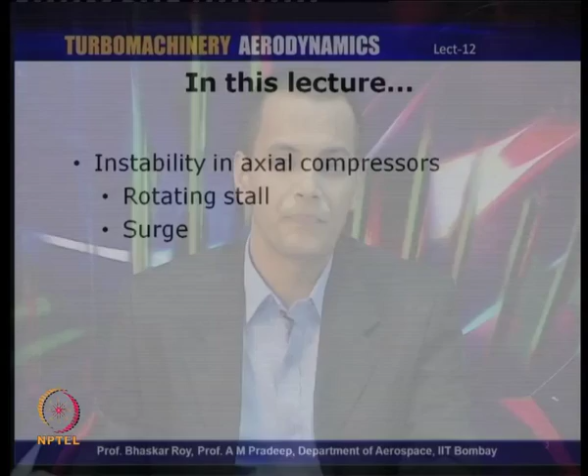So instability is the major topic we are going to discuss in today's talk. Basically we are going to talk about two different modes of instability in great detail: rotating stall and surge. These are the two basic aspects of instability we will discuss, and we will cover instability in general as well in today's talk.

Now, one of the major issues with engine operation, and the effect of trying to operate under off-design conditions, is the fact that there is one component which will limit the performance or operation of the whole engine as a whole, and that is the compressor.

So the compressor is the component which determines the stability and limits of operation of the engine as a whole. In the last lecture, if you remember, we had discussed the axial flow compressor performance map. During this discussion, I had mentioned that there are two limits of operation of the axial compressor.

On the right hand side of the compressor map, we have what is known as the choking point or the choke limit, which is to do with the maximum mass flow rate, and on the left hand side of the compressor map we have what is known as the surge limit or surge margin, the limit to which surge can occur.

So these are the two bands or regions or lines within which the compressor operation is considered stable or feasible. If we try to operate the compressor beyond these limits, the compressor is going to go into instability modes and the operation cannot be successfully carried out.

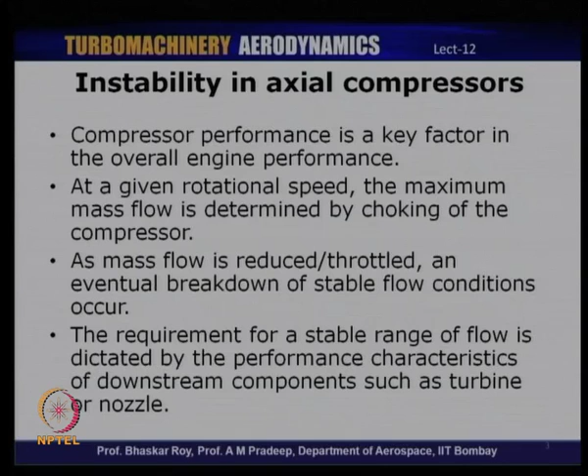As I mentioned, compressor performance is obviously a key factor in the overall engine performance. At a given rotational speed, we know that the maximum mass flow is determined by choking, and as mass flow is throttled, there is an eventual breakdown of stable flow conditions, and the stable performance or range of the engine is therefore dictated by the compressor performance itself.

We also like to understand here that an aircraft engine, as we know, is designed to operate for a certain condition known as the design condition, but during takeoff, climb, cruise, and finally landing, we see that the engine is operating under a variety of operating conditions.

So, how is it that we can ensure that this engine is going to operate stably in all these operating conditions? That is a big challenge for an engine designer, because there are so many components that fit into an aircraft engine, and how do we ensure that each of these components will be able to perform well under all these so-called off-design conditions.

One of the most crucial components amongst all the others is the compressor, because compressor performance is limited between the choke limit and the surge limit, and there is a certain band which we can use for stable operation of the compressor. We do not want the compressor to operate close to these two limits, because that will risk the compressor going into instability modes in the event of an off-design operation.

The ability to efficiently operate such an engine at all these operating conditions will also depend upon a successful match of all the components within an engine and also within the stable operating range.

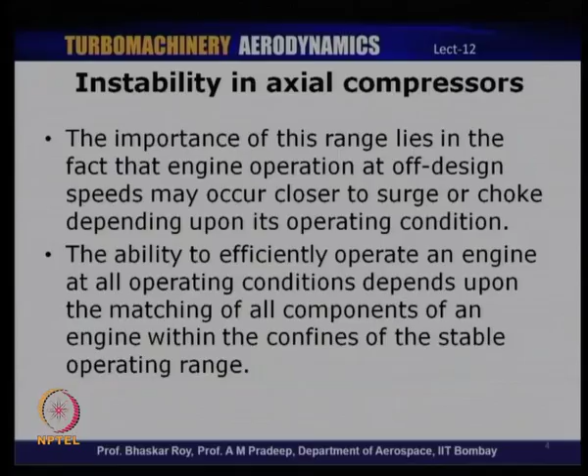For example, an engine typically has an air intake, then a fan or compressor, then the combustion chamber, turbine and a nozzle. These are the salient features of a so-called turbojet engine, and all these components need to operate in a synergistic manner in the given operating range, as well as under off-design conditions which are expected to be encountered by the engine.

The compressor being the key component among all of them, it is very necessary that the engine designer understands the performance of the compressor over a range of these operating conditions.

So what I will do now is quickly go through the compressor map once again. We have discussed that in one of the earlier lectures. Let us take a quick look at that once again, and try to understand what I am currently talking about - what are these different limits I have been mentioning.

Here is a typical compressor map, a typical multi-stage compressor map. On the y-axis we have the pressure ratio, and x-axis is the corrected mass flow rate m dot square root of theta by delta, where theta is the temperature ratio and delta is the normalized pressure ratio. A typical compressor map will consist of lines corresponding to different speeds - rotational speed is given by these different lines.

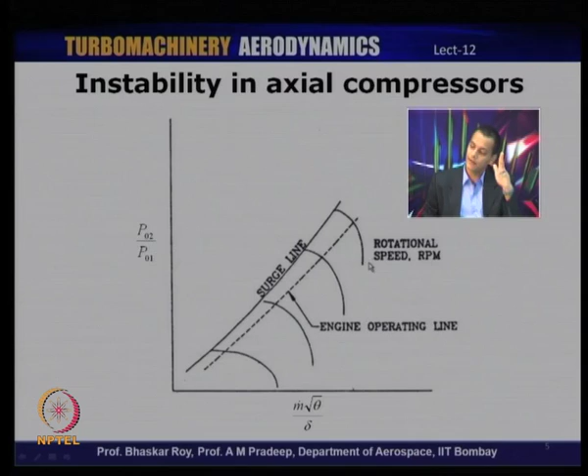We have seen two different limits that I was talking about. One is about choking - that is this line here. If you draw a line here, that corresponds to the choking limit, because beyond this point the mass flow rate does not change for a particular speed - that is the choking limit.

On the left hand side, we have a line which I have denoted here as the surge line. We will talk about surge in a lot more detail in some of the later slides. Compressor operation on the left hand side of this line is unstable because of the occurrence of surge. And what is shown here by the dotted line is the engine operating line.

Now, the engine operating line is the line which the designer has set for stable operation of the engine at different speeds, and the difference between this and the surge line is the surge margin. You can see that it is a rather narrow margin, slightly exaggerated here. In modern engines, the surge margin is kept very narrow because higher efficiency is obtained very close to surge.

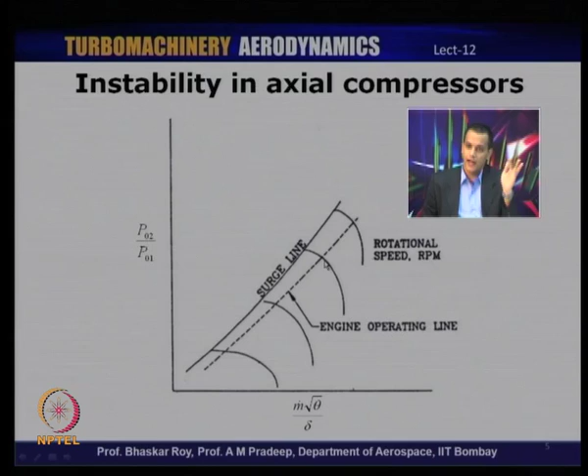So this is a typical compressor map, and this is going to limit the performance of an engine as a whole, because you have so many other components in an engine - the turbine, combustion chamber, nozzle, intake, and so on. The compressor map will tell us what kind of limit we have for operating this engine in a stable manner.

So the operating line you saw basically corresponds to the line or zone designed by an engineer for stable operation of the engine. The engine is still allowed to deviate from this operating line by a certain amount, but certainly not beyond the surge margin, because that would mean the compressor has surged, and that would also mean the engine operation is in danger. We will discuss surge a little later.

So the basic intent of this lecture is to understand what are these different instability modes that are likely to be encountered by a compressor, what is the mechanism of these instabilities, and what really happens during these instabilities. But before that, let us first try to understand what we mean by an instability in the first place.

Let us try to define instability, and from there we will talk about instability as applied to a compressor. If you have undergone certain courses in physics and equilibrium and so on, you are probably familiar with stability or instability as a general term. We are referring to that in this context also, in that fashion.

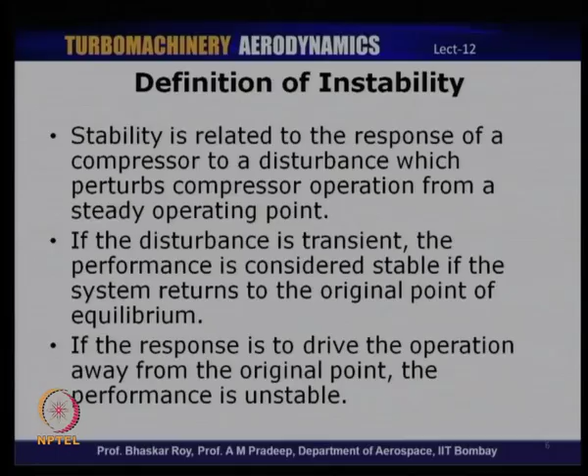So the compressor could, depending upon its mode, operate in either of these regimes. It could either return to its original state, where we say the compressor is indeed stable, or it could happen that the compressor does not return to its original state, which is referred to as an unstable mode of operation of the compressor. So these are the different issues we are going to discuss in today's talk - what are these unstable modes of instabilities that a compressor is likely to encounter.

So let us now talk about the different types of instabilities that a compressor will encounter. We can classify instabilities encountered by a compressor broadly into two types: one known as operational instability, and the other known as aerodynamic instability. So there are two areas of compressor performance that relate to stability - one is operational stability, the other is aerodynamic stability. Operational stability involves matching the performance characteristics of the compressor with the downstream components. Aerodynamic stability is the limitation of steady operation of the compressor due to what are known as surge and stall.

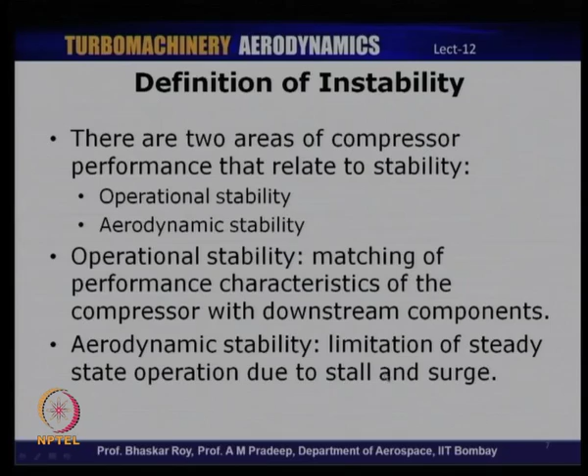We will spend a lot of time discussing aerodynamic stability, because this course is primarily dedicated to aerodynamics of compressors and turbines and other turbomachines. But let us also try to understand operational stability as well.

Operational stability relates the compressor to certain downstream components as well. That is, if the downstream components perturb the compressor operation, what happens to the overall operation of the compressor. That mode of stability is referred to as operational stability. Here we consider not just the compressor, but components which are dependent on the compressor, or components which influence the compressor performance.

What are these different components? It could be downstream components like the combustion chamber, the turbine, the nozzle and so on. These are the components which can influence the compressor performance. So operational stability will take into account all these components put together and their effect on the compressor performance.

In operational stability, the complete compressor system, including the inlet ducts, guide vanes, the rotor and stators of the compressor, and the exhaust systems are considered.

Operational stability depends upon the rate of change of pressure rise or pressure drop as the mass flow rate varies. System stability is established when the rate of change of compressor pressure rise with mass flow is algebraically less than the rate of change of throttle pressure drop with mass flow.

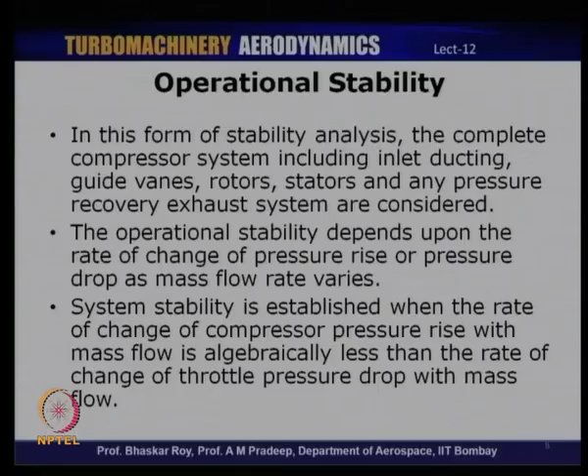Well, that last statement looks a little confusing. I'll try to explain it in one of the next slides, where I'll clarify what I mean by saying that stability is established when the rate of change of compressor pressure rise with mass flow is algebraically less than that of the throttle mass flow. So let us try to understand this in more detail.

For that we will again take a look at a compressor map, a very schematic typical compressor map. We will look at what we mean by this statement and how we can analyze operational stability of a compressor. So I have here a typical operating line of the compressor speed line.

What is denoted here by the solid line refers to the compressor operation, and what is denoted by the dotted line refers to the characteristics of a throttling device or a flow device. It could be a nozzle or some other component downstream of the compressor that can change the compressor operation. So the solid line refers to compressor operation, and the dotted line refers to throttling operation.

There are three different modes of operation I have shown here. Let us take a look at the first one. Here we have the compressor characteristic shown by this line and the throttling characteristic shown by this other line. The throttling characteristic intersects the compressor characteristic at this point, denoted here.

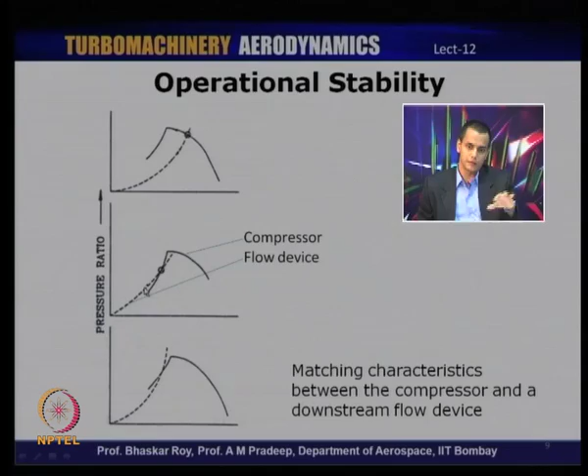This means that since the slopes are different here, let us consider the rate of change of throttle mass flow, and compare that with the rate of change of the compressor characteristics.

As the throttling characteristics change, the rate of change becomes less than the rate of change of pressure drop across the compressor. This means that as you throttle more, the pressure drop is lower than it should have been. Since the pressure drop is low, and the rate of change of throttle mass flow is larger, it leads to further decrease in mass flow, and since the slope of the compressor is still higher, it could lead to further decrease in pressure ratio, and this goes back and forth.

So you can clearly see that if the throttling characteristic has a slope less than that of the compressor characteristic, that is a region where the compressor operation is going into an unstable mode of operation. This is a typical example of an operational instability.

Now the other extreme is something theoretically possible, but aerodynamically cannot really be achieved. That is the third characteristic, where the compressor characteristic has a slope less than that of the throttle characteristic. So there is a difference in slope between the compressor and the throttle - what causes that, and what happens in such a scenario?

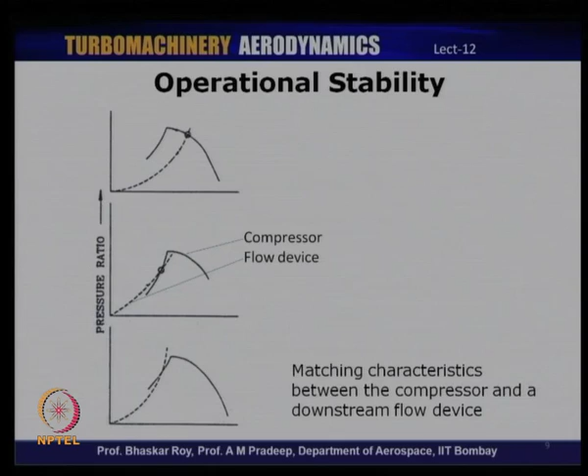This could theoretically lead to stable operation of the compressor, meaning we are not really in an unstable mode here, even though we are operating on the left hand side of this line, which is theoretically supposed to be an unstable zone of operation. But we see that it is in fact theoretically possible to still have operational stability even while operating on the left hand side of the performance curve.

So theoretically it should be possible for us to operate on that side, but what we will see next is that that is the region where aerodynamic stability cannot be achieved, and that is the next topic we are going to talk about - aerodynamic stability of an axial compressor. That is of little more significance to us, since we are talking about aerodynamics of compressors, so understanding aerodynamic stability would be of more significance.

So what do we mean by aerodynamic stability? Aerodynamic stability basically refers to the compressor system's ability to maintain or deliver a higher or increased pressure rise even when there is a perturbation in the mass flow to a lower value. That is, as you perturb the mass flow to a lower value, the ability of the compression system to either maintain the pressure itself or increase the pressure for a lower mass flow.

This is what happens if you remember on a compressor curve: as you go from the choke limit to the peak pressure, as you decrease mass flow, you actually get a higher and higher pressure ratio up to the peak pressure point where the slope is zero. Beyond that, to the left hand side, a drop in mass flow will also lead to a corresponding drop in pressure ratio, which is not a desirable characteristic because it leads to aerodynamic instability. So this part of the compressor characteristic with a positive slope is a region containing subsystem stall or complete instability, which could lead to surge.

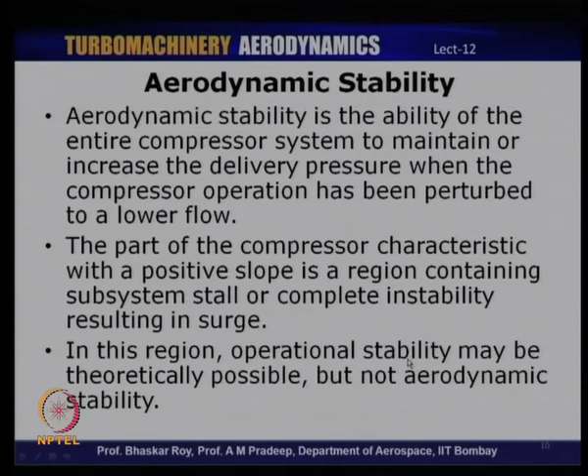So stall and surge are the two instabilities that get initiated if you operate on the left hand side of the curve. In this region, as we have already seen, operational stability may still be possible, but aerodynamic stability is not possible. So let me explain that a little better.

This is a typical compressor characteristic, a rather flat curve compared to what actually happens in compressors, where you could have a sudden drop in certain conditions. The dotted lines indicate throttling characteristics, as we have seen in the last picture. There are three different throttling characteristics shown here, given by A, B and C, and the solid line corresponds to the compressor characteristic itself.

Between points A and B, these throttling characteristics intersect the compressor characteristic where the slope of the compressor performance is negative. Therefore, these lines correspond to stable operation of the compressor itself.

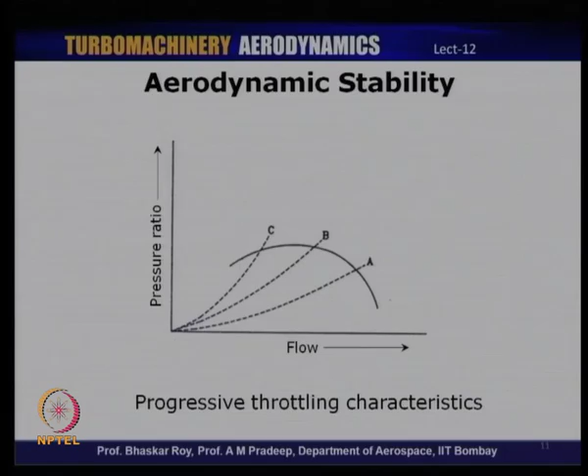Let us consider point A. Between point A and B, the increase in energy input is always greater than the corresponding increase in losses in the compressor, and therefore you continue to get higher and higher efficiency. At point B and beyond, the losses encountered by the compressor become higher than the input energy itself, meaning we begin to lose efficiency beyond this point B.

So beyond operating point B, we start losing efficiency, and beyond point C, the loss in efficiency becomes so high that the compressor operation itself becomes unstable, due to the initiation of aerodynamic instabilities like stall or surge. Between points A and B, we could operate the compressor in a stable manner.

You would like to operate at as high an efficiency as possible, which is probably close to point B, where the rate of energy input continues to be much higher than the rate of increase in losses. Beyond point B, the losses start building up, and there is a huge mismatch between energy input and losses, causing you to lose efficiency.

So as we have seen, it is still possible to operate on the positive slope of the compressor map, but that is only stable from an operational standpoint. That region is where compressor operation is aerodynamically unstable, and you obviously cannot operate in a region where the compressor is aerodynamically unstable.

Let us now start discussing instabilities in greater detail, what is meant by operational instability versus aerodynamic instability. Let us discuss the aerodynamic instability in a little more detail.

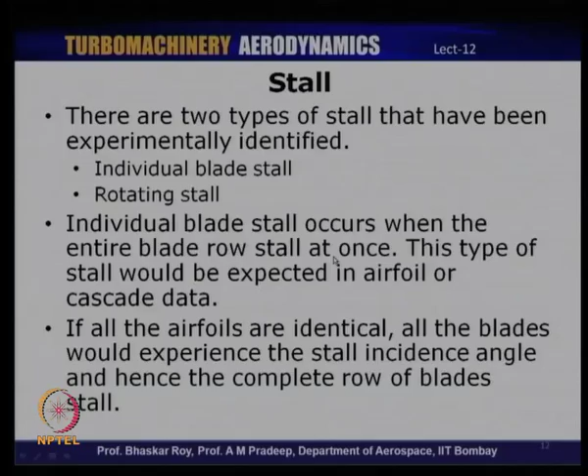Individual blade stall occurs when the entire blade row stalls at once, something you would encounter in an airfoil cascade experiment. Since all the airfoils are at the same stagger, as you change the incidence, all the blades change simultaneously. So if stall is encountered on one blade, it should be the case that all the blades have stalled simultaneously, because all of them have the same stagger and incidence angles.

Since all these airfoils are identical, like in a cascade, all of these blades are likely to stall, and that is basically referring to an individual blade stall.

But in an actual compressor, we do not really have a scenario where all the blades stall simultaneously, because it is in a cylindrical coordinate sense, unlike a linear cascade where blades are arranged in a linear fashion. In an actual compressor, one is likely to encounter what is known as rotating stall, which is the most common type of stall in an axial compressor.

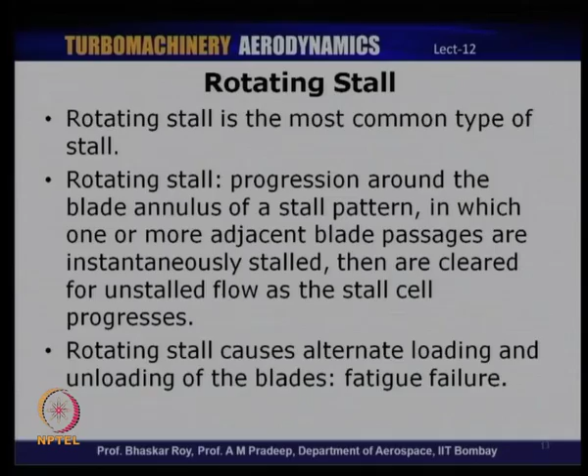Rotating stall involves progression around the blade annulus of a stall pattern, in which one or more adjacent blade passages are instantaneously stalled and then cleared for unstalled flow as the stall cell progresses. That is, there would be alternate stalling and unstalling of either one blade or a group of blades, forming a stall cell that continuously moves along the annulus.

This is because the rotor itself has a rotation, and therefore the stall cell continuously moves, which is why it is known as rotating stall. Either one or a group of adjacent blades would be stalling, and this stall cell progressively moves along the annulus of the compressor itself.

Let us try to understand the mechanism of rotating stall and how it propagates. Consider a set of blades of a typical axial compressor. Let us assume that due to some reason—incoming flow being non-uniform, or local issues with the stagger of one of these blades or set of blades—the incidence angle to one of these blades exceeds the design value, leading to stalling.

You can compare this with an airfoil's CL-alpha characteristic: as you keep increasing alpha beyond a certain angle, the flow stalls. Something similar happens here—the incoming flow to either one blade or a set of blades has a higher incidence than it should have, leading to separation from one of the surfaces of the blade, and hence stall. What you see here is basically a stall cell.

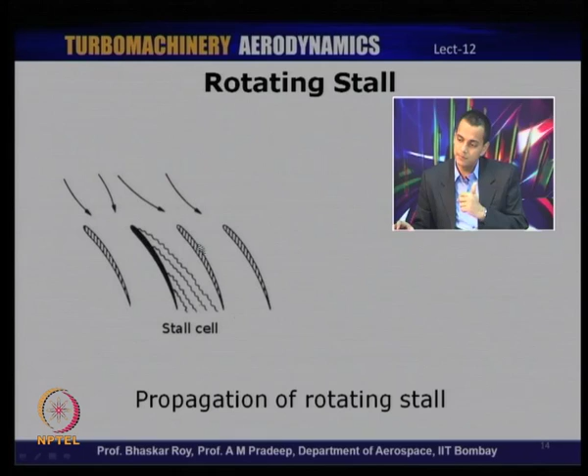As these blades move, and since the incidence continuously changes from one blade to another, the adjacent blade now sees a flow with higher incidence, which means this blade will now begin to stall. As this adjacent blade stalls, because of this stall, it unstalls the previous blade which was earlier undergoing stall. This is owing to the fact that these blades are rotating with the rotor speed. So as the blades rotate, the blade which was earlier stalled will now unstall, and the stall progresses to the next blade, and this continues.

Therefore, effectively one can see that the stall cell is now moving in a direction which is opposite to that of the rotor rotation itself. So rotating stall usually has a direction of propagation opposite to that of the rotor.

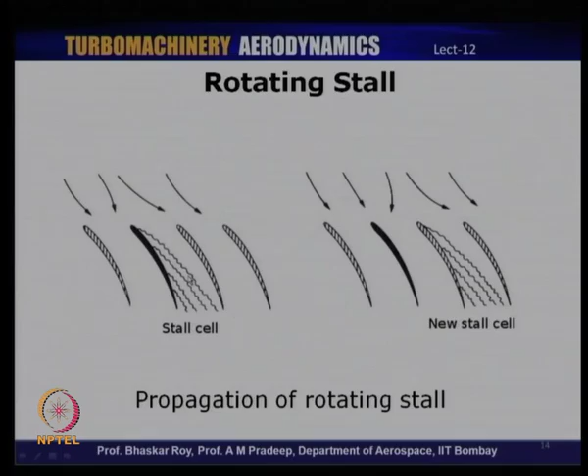Here we have visualized one blade undergoing stall. It is possible that there could be multiple blades undergoing stall, with multiple stall cells propagating along the annulus of the compressor. We will see some of these examples in later slides. This is a typical mechanism by which rotating stall occurs.

In the next lecture, we will attribute rotating stall to effects related to the incoming flow itself—that is, if the incoming flow is non-uniform, what we refer to as distorted inflow, it has an effect in initiating rotating stall in axial compressors.

As I mentioned, you could also have more than one set of stalls or stall cells moving along the annulus. Like you see here in this example, there are multiple stall cells propagating along the tip of the compressor blade.

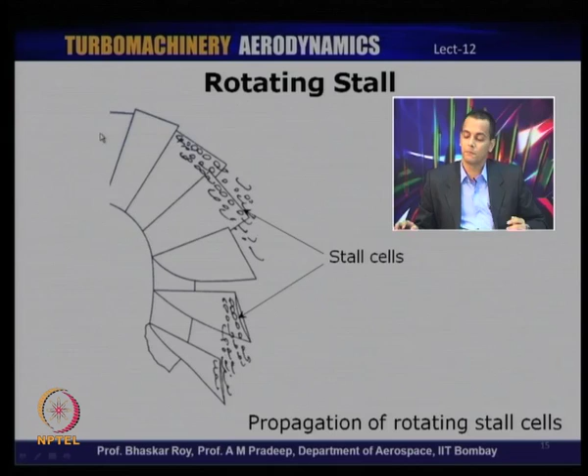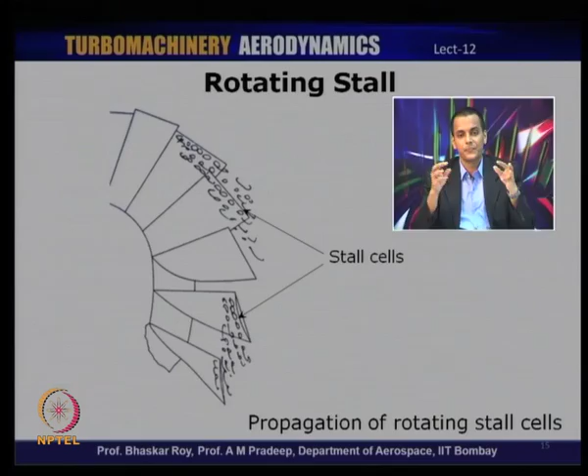You could have multiple number of stall cells, either one stall cell or a number of stall cells. In fact, it has been observed experimentally that there can be as high as 9 stall cells. So between 1 to 9 or more stall cells are possible, and the number of stall cells also tells us something about the nature of the stall itself.

Either one could have a mildly progressing stall, or what is known as an abrupt stall. We will also see what these two different types of rotating stall initiation mechanisms are. It has also been observed that rotating stall, if allowed to progress and continue, will lead to another instability or extreme instability of compressor operation known as surge, which we will discuss in more detail later.

The rotating stall often precedes surge, and we have seen that the rotating stall propagates in a direction opposite to that of the rotor rotation. You could have rotating stall frequency as high as 50% of the rotor frequency itself.

You could also have stall of different types. You could have what is known as part span stall - if you consider this to be the annulus of the compressor, this the hub and this the tip, you could have stall extending only up to a part of the span, not from the tip all the way to the hub, with multiple stall cells as you see here. Or you could have full span stall, where the stall cell extends all the way from the tip to the hub.

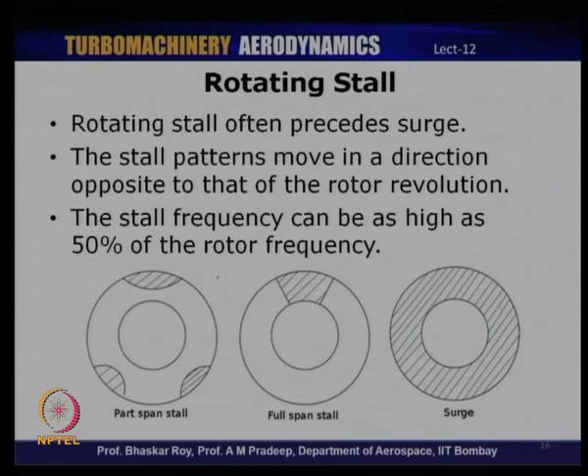Or you could have the entire annulus itself stalled, which is what would happen if we approach or enter into surge - which is why I mentioned that rotating stall often precedes surge.

Rotating stall can be initiated by a variety of reasons, the most common being off design operation, and another common reason is inflow distortion. That is, if the incoming flow to the compressor is non-uniform, there could be small pockets or regions where the local flow incidence approaching the compressor rotor is much higher than the design incidence, leading to initiation of stall in some of those blades.

Once initiated, the stall will begin to propagate, and if conditions are favorable, the stall propagation continues and develops further. In some cases it can also be dissipated if the conditions are not favorable.

Another reason for rotating stall initiation could be a slight mismatch in some blades having slightly higher stagger or a slightly different profile due to manufacturing defects. Once this kind of compressor enters a slightly off-design condition, it is possible that these blades with a slight mismatch in stagger or profile will initiate rotating stall.

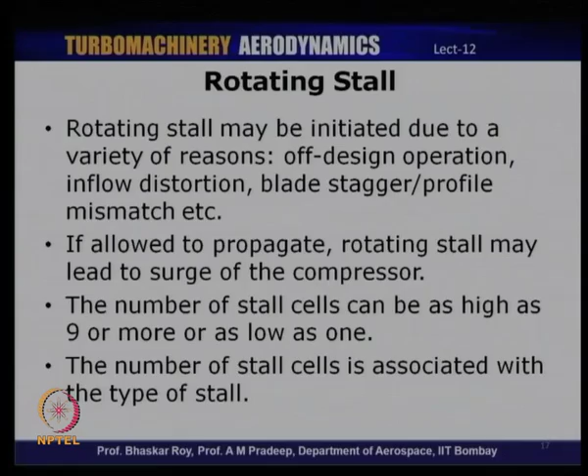I have also mentioned that the number of stall cells can be as high as 9 in certain cases, or as low as 1, and the number of stall cells is also associated with the type of stall. There are two types of stall observed experimentally: progressive stall and abrupt stall. Some of the latest literature refers to these modes as modal inception of stall or spike initiated stall.

If in some cases stall is initiated in a progressive, mild manner, it is referred to as modal inception of stall. Or you could have an abrupt or sudden initiation of stall, referred to as spike initiated stall. In progressive stall we have a gradual reduction in total pressure ratio after initiation, whereas in abrupt stall there is a discrete jump or decrease in pressure ratio as stall is initiated.

Progressive stall is usually associated with multiple stall cells - more stall cells, which is why there is a progressively decreasing pressure ratio. In an abrupt stall, it has been observed that it is initiated with one stall cell, but that is a larger stall cell extending all the way from hub to tip.

Progressive stall or modal stall inception is usually associated with multiple stall cells which are propagating. Abrupt stall or spike initiated stall is usually associated with a single stall cell which initiates this kind of stall.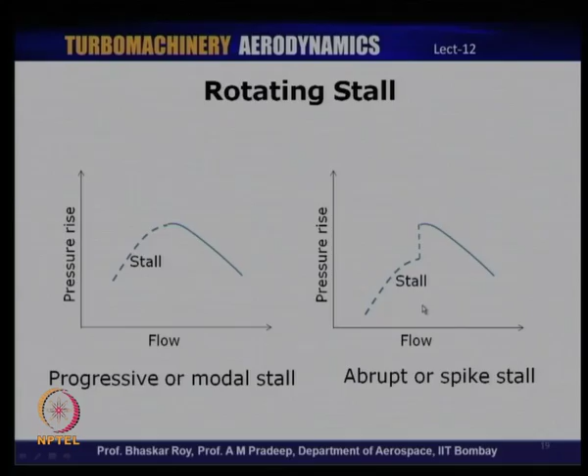So these are two different modes of compressor stall which have been observed by different researchers, and they attribute it to various mechanisms. There are a lot of theories which have been proposed on why this kind of stall mechanism is initiated, which I will not go into details of.

So let us consider just the progressive stall and try to look at what really happens when it is initiated. This chart shows us the variation of stall pattern in a typical progressive stall. Not necessarily true for all cases, but in this particular case, progressive stall can be explained using these characteristics.

So as you throttle the mass flow, we have an increase in pressure ratio, we reach the peak pressure point, and since this is a progressive stall, we have a gradual decrease in the pressure rise characteristics.

What really happens in this scenario is that, in most of the compressors we encounter, stall is initiated from the tip of the blade. This is referred to as a tip critical rotor, where stall is initiated from the tip of the rotor, which is true for most compressors. There are exceptions where stall could also be initiated from the hub, but those are relatively rare.

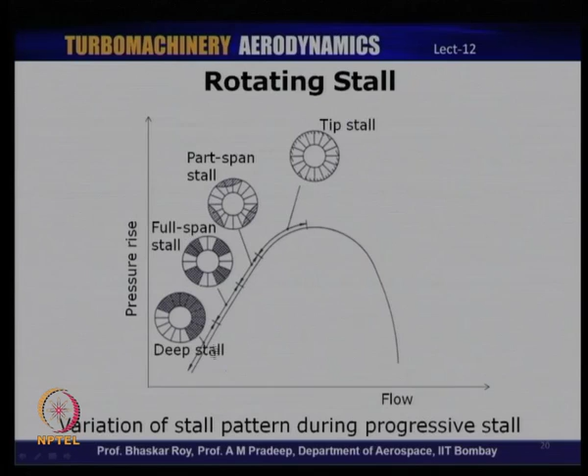So as you enter into the positive slope of the compressor characteristic, stall is initiated from the tip, and as we progress further down, we have part span stall with multiple stall cells, and then this extends to full span stall, and then deep stall, where a large fraction of the annulus has stalled flow. So this is typically how a progressive stall would evolve and develop.

Okay, so having understood rotating stall, let us now quickly look at the other mode of instability, which is probably a more serious mode of instability, that is surge.

Now, it is possible that when we enter into deep stall and the full annulus is under stall, this could also lead to surge. What happens in surge is a complete breakdown of stable operation of the compressor flow, and there is a violent oscillation of mass flow back and forth along the length of the compressor. This is typical of a multi-stage axial compressor.

What basically happens is that as you operate on the left hand side of the compressor characteristic, any decrease in mass flow rate will be accompanied by a corresponding or greater decrease in pressure ratio, and this drop may not match the pressure ratio downstream, leading to a backflow from downstream all the way to the upstream of the compressor. This mass flow fluctuates back and forth in the compressor, and this is a complete breakdown of mass flow, leading to failure of the compressor operation itself, which eventually leads to failure of the engine, possibly engine shutdown.

So this is a very extreme case of instability of the compressor, which all designers would want to prevent, and which is why I have been mentioning surge margin, provided in all axial compressor operation — the band in which the compressor is stable. One should not exceed the surge margin, because the compressor is likely to encounter surge.

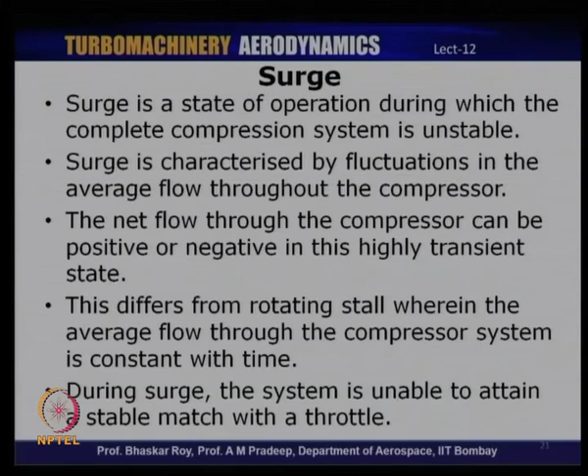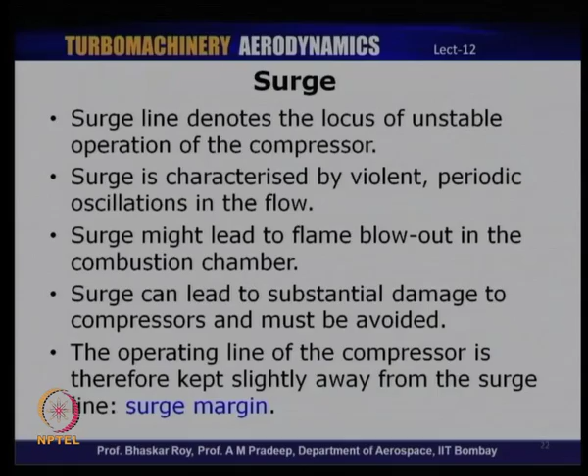In the compressor operating line, we have seen the surge line, which denotes the locus of unstable operation of the compressor. Surge may lead to flame blowout in the combustion chamber and can lead to substantial damage of the compressor itself. So during the design of a compressor, the designer provides a certain margin within which one is recommended to operate, known as the operating line, and there is a difference between the operating line and the surge line.

That difference is basically the surge margin, the margin provided for operating this compressor. Even under off-design conditions, one should ensure that the off-design operating point is still away from the surge line and not too close to it, because if it is too close, there is always a risk that the compressor might get pushed into surge, which is detrimental.

If you look at this compressor map, shown earlier, this is the surge line, the locus of all the surge points. If you join the surge points at different operating speeds, you get the surge line, and this dotted line is the engine operating line. So this difference is referred to as the surge margin.

Modern day compressors are designed to operate with a very small or narrow surge margin, to ensure that the compressor operates with fairly high efficiency, delivering a high level of pressure ratio. At the same time, we want to ensure that the compressor does not move very close to the surge line, because that is quite risky.

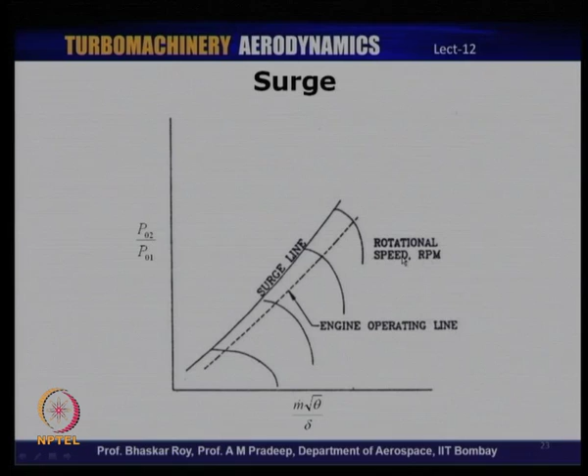Let us now look at some examples of actual experiments carried out several years ago. This is one classical example of a single stage characteristic, from a very old paper by Huppert in 1952. As you can see, it is more than 50 years old, but it is still considered a classical paper because it explains a lot of the issues related to surge.

Here you can see compressor operation at two different speeds, showing what I referred to as hysteresis. I will explain this in more detail in the next class, but as the compressor enters into surge between points A and B, there is a sudden drop in the performance characteristic, and as you try to recover the compressor operation from the surge point back to the stable operating range, it does not trace the same path. This loop is referred to as hysteresis.

You might be familiar with hysteresis in magnetic or ferromagnetic materials - a similar aspect is observed in compressors. As the compressor enters into surge or deep stall, and if you recover from that operation, the operating points are slightly different, which is attributed to hysteresis. I will explain that in more detail in the next class.

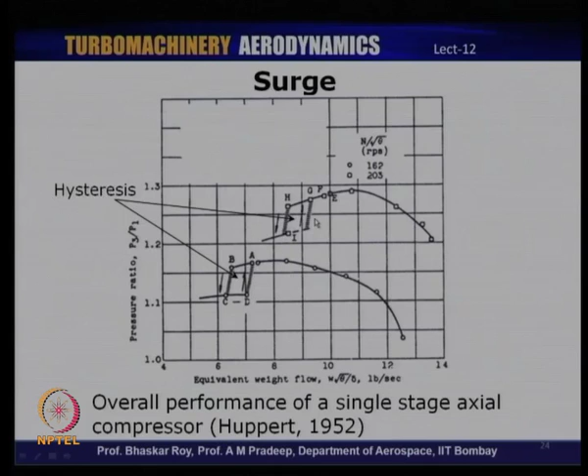There is one more example I would like to show, from an old paper by Greitzer and his group at MIT, also explaining hysteresis associated with surge and its initiation. As the compressor operation is taken from its choke point all the way to peak pressure, there is an abrupt stall and surge operation, where the compressor enters into a surge mode of operation. Once it is taken out of that mode, it takes a different path, which is again attributed to hysteresis.

That is also seen in this particular characteristic, as you can see. Now, Greitzer also observed in his experiments the effect of rotating stall and surge, and you can see how these instabilities were actually measured in terms of velocity variation.

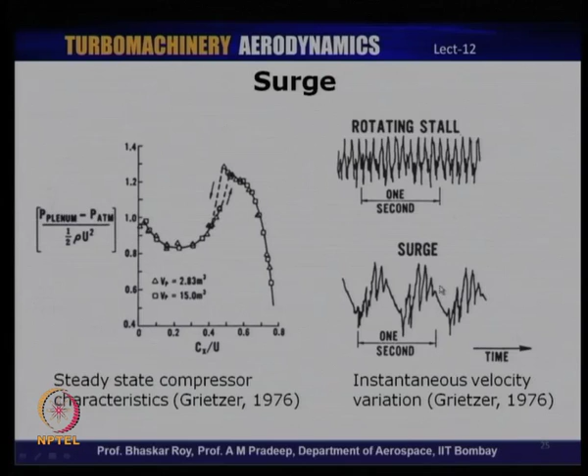If you were to measure variation of velocity in a compressor undergoing rotating stall, you would see several fluctuations within a second, which means the frequency of rotating stall is several orders of magnitude higher than that of surge. In surge, one second probably has just one or few fluctuations, whereas in rotating stall you have several fluctuations taking place in a second. The fluctuations in surge are basically axisymmetric, and the flow moves back and forth with a frequency much less than that of rotating stall.

Rotating stall can have frequencies as high as 50% of the rotor frequency itself, which means it can indeed have very high frequencies. Surge, on the other hand, is not related to the rotor frequency. It is just axisymmetric motion of flow back and forth in the compressor, which could have very low frequencies, usually one order less than what is encountered in rotating stall.

This is just to summarize the different modes of instabilities discussed in today's lecture. Of course, there are a few more aspects that need to be discussed, and I will take that up in the next class, where I will also talk about hysteresis, and we will discuss more details of instabilities and inflow conditions on instabilities later on.

In today's lecture we discussed instability in general and instability as applied to compressors, and what we mean by instability of axial compressors. You have seen there are two modes of instabilities in general: operational instability and aerodynamic instability. We have also seen that even though it is theoretically possible to operate on the positive slope of an axial compressor map, where operational stability can be maintained, it is aerodynamically unstable.

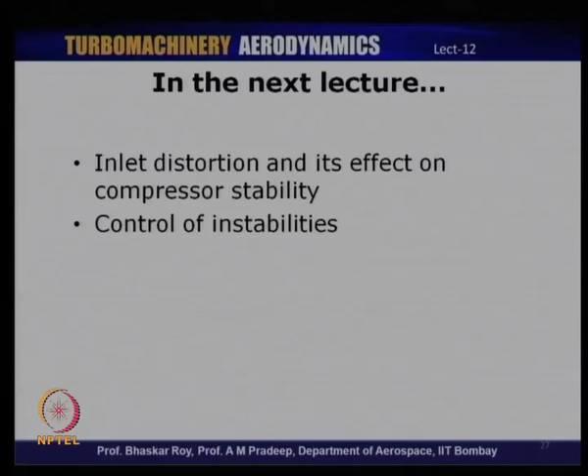We will talk about the effect of distortion on the performance or stability of the compressor. We will also spend some time discussing methods of controlling these instabilities, because we would like to control instabilities while also operating the compressor as close as possible to the highest efficiency point, which might lie very close to the surge line. So we would also like to explore mechanisms or methods by which these instabilities, if initiated, can be controlled, so that the range of operation of the compressor can be extended. We will take up some of these topics in the next lecture.